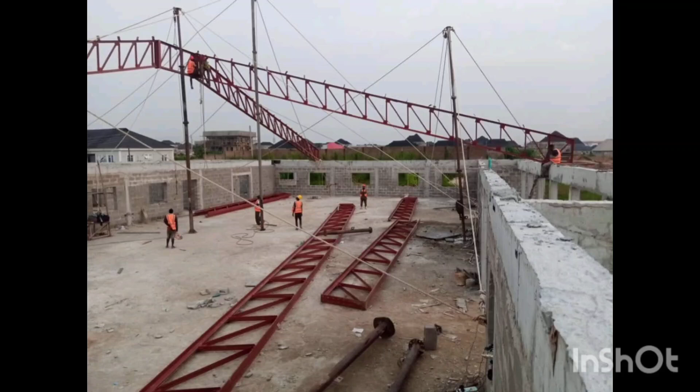Hello everyone, in this tutorial I'm going to explain how to measure roof trusses, steel roof. So this is the 3D, and this is the roof plan.

First of all, I'm going to interpret the drawing to us so that we're able to understand the roof itself. So let's get started. Now this is the roof plan.

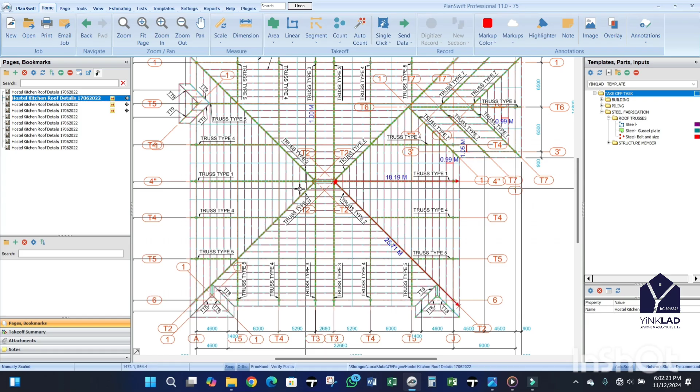We have different types of roof trusses here: type 1, type 4, type 2, and others, and we have type 3. Next page, we have type 1, and we have two numbers of type 1. Let's check it out, this is type 1 and this is type 1.

We have two numbers. I want you to take something into consideration. When you're measuring the roof, you have the roof plan, and also the section. Mind you, when you are viewing a roof from the top as a bird view, the dimension you take from the roof plan will be different, it will be lesser, compared to the section, I mean when the roof stands, when the construction has been done.

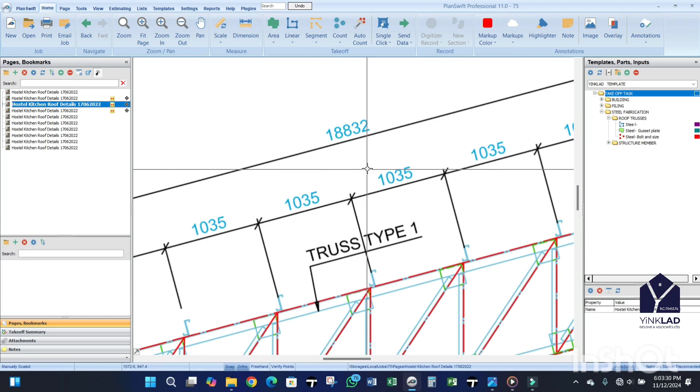So what do we have? For type 1, we have 18.19 here. So for this section, we have 18.832. Now, for the interpreting of the drawing that I said.

So now, good, let us start. I'm going to start, okay.

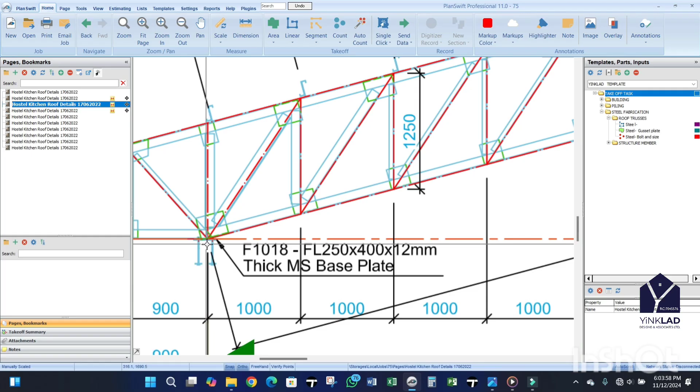We have gussets, we have base plate. This base plate is being positioned on the roof beam, like it is fixed on the roof beam. It's connected to the hold-down bolt that is inserted into the roof beam. After placing the base plate, there'll be a nut that we use to tie it down on the roof beam. So we have F1018 FL 250, blah blah blah, thick MS base plate.

I'm still going to show you some pictures during the fabrication and installation. Just hold on, I want to interpret this drawing first.

So this one is a universal beam, UB universal beam, to receive truss type 3 at both flanges. What do you mean by flanges? I will explain that on the picture.

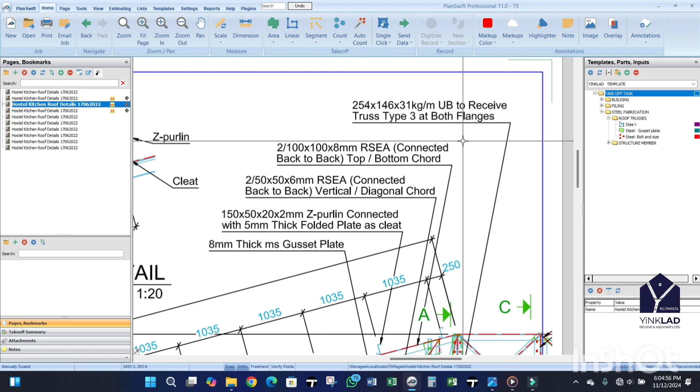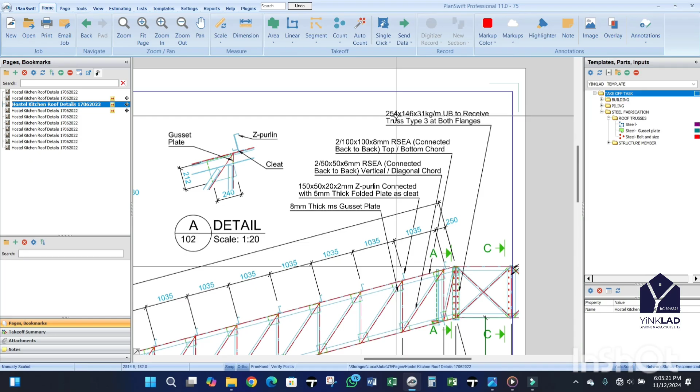So that means what this drawing is saying is that this is 254, 146, 31 kg per meter, to receive truss type 3 at both flanges.

Let me show you truss type 3. This is truss type 3, I'm coming. Okay, you have four numbers of truss type 3: one, two, three, four.

That means the beam I showed you, the universal beam, is to be positioned here. So you have flange here, flange here, and this is the web, flange here, flange here. According to the drawing, this is what we want to measure for now: truss type 1. So the truss type 1 will be fixed inside the web.

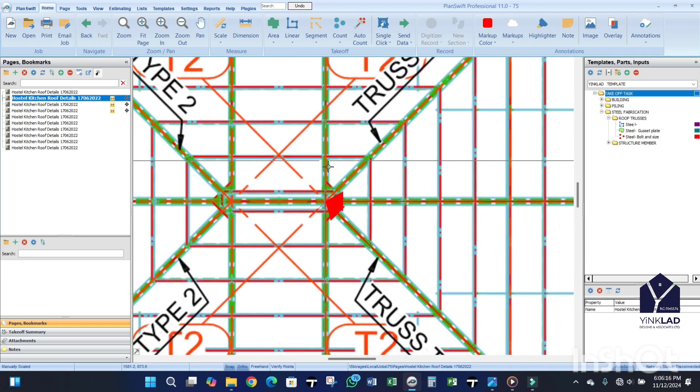You understand? Then truss type 3, what is it called? Truss 3 will be fixed, attached to the flange of the universal beam with bolts and nuts. Good, then what else?

2 by 100 by 100 by 8, connected back to back, top and bottom chord. So let me explain this one, let me see the call out.

Okay good, this is what is being called out as back to back. I want to explain back to back to you guys. So this is what we mean by back to back. Let me first show you this one.

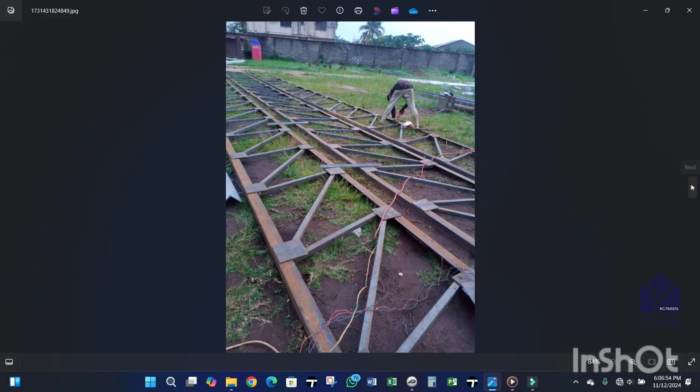You have fabricated one side, you also fabricate the other side. So these two trusses, after fabrication, are being placed back to back, like this one is placed on top of this one. That is what we mean by back to back.

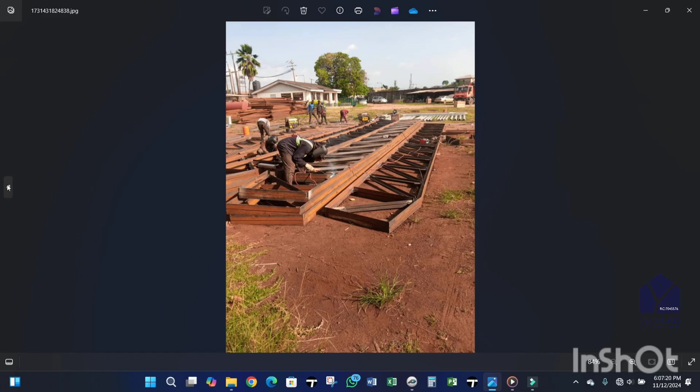So the one being called out that I explained last time is here at the top. Let me show you, so this is what we mean by back to back. It is being lapped, positioned at both ends, you understand me, one, two.

So this is what is being called out that I showed you. Let me show you this area, top, the top chord, according to the top or bottom chord. This is the top chord, you understand me? This is the top chord. Here, straight down is the top chord. This one too is the top chord, it's back to back.

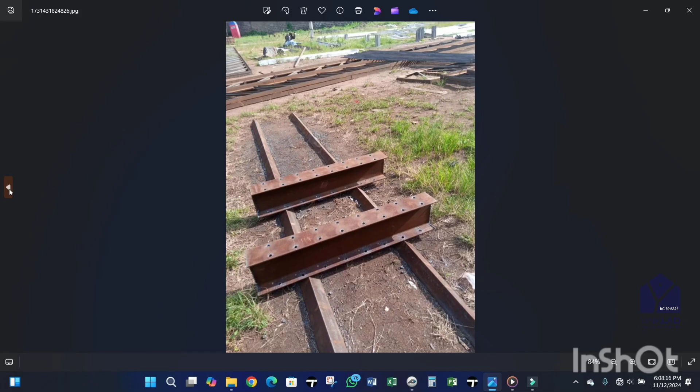Then next one, just check this one out. 50 by 50 connected back to back again. So the diagonal, vertical or diagonal chord. This one, let me show you guys. This is the diagonal. Let me check down. Okay, good. This is diagonal.

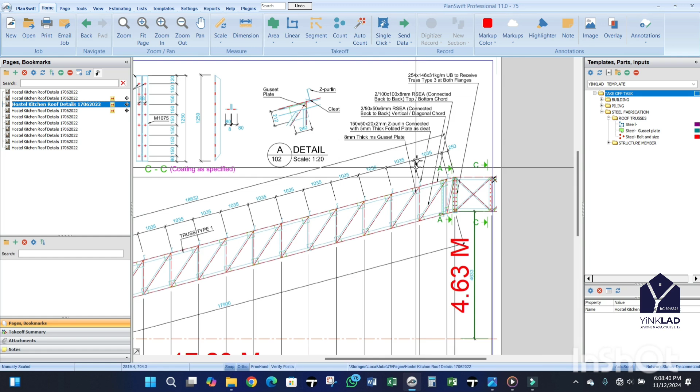You understand me? But this is another truss type, maybe one or two. It's not truss type one. You're just trying to explain the diagonal chord. Diagonal chord, right? Yes. So you are done with this one. Then what else? Purlin. Okay. 150 by 50 by 20 by 2 mm Z-purlin connected with 5 mm thick folded plates as cleats.

The purlin. I don't know, maybe I have the picture here. Oh my god. Oh my god. Ah, it's not how it is. Okay. I don't have it, mistake.

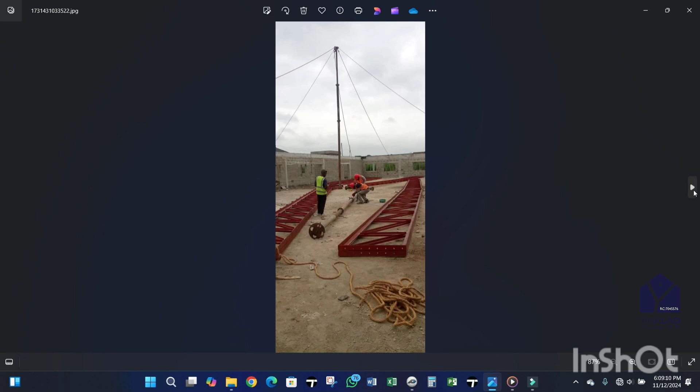Okay, let me just explain where the purlin will be positioned. Let me first check the roof plan. Okay, this is the purlin line. You understand me? This vertical and horizontal are the purlin lines. You understand me? It will be positioned according to this. He said Z-purlin connected with 5 mm thick folded plates as cleats.

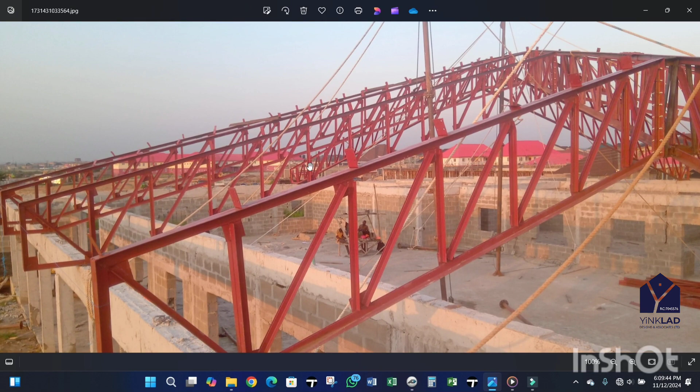Let me show you in the picture. This is the cleat. This cleat is being fixed, is being attached on the top chord that I showed you that time. This is the top chord. The cleat is being positioned on it so that the Z-purlin will be attached, will be screwed to this cleat, but the purlin has not been fixed yet. I don't have the picture on my laptop for now. So this is the diagonal chord that I explained that time. You understand me? So what else?

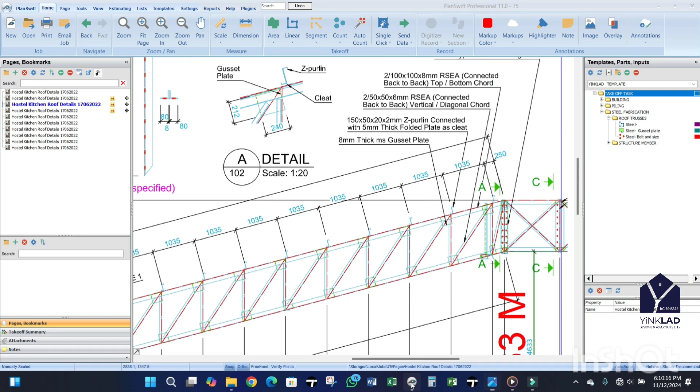This is the gusset plates, 8 mm thick MS gusset plates. Let me show you guys. This is what I mean by gusset plates. The gusset plate is being positioned, fixed in between the back to back chord. Let me show you during the fabrication. This is the gusset plate. The function of the gusset plate is to help hold the vertical and diagonal chord and the top and bottom chord so that everything will stand firm together. You understand me? So we have two gusset plates, the first side and second side. We now attach it together.

I'm coming. I want to show something.

Okay. What we did then, I could remember, is that we have only one gusset plate. Only one gusset plate I could remember, yes. Because let me check this drawing. It's only one. It's not back to back. You understand? It's not back to back because it's not given that it's back to back. It's only one gusset plate.

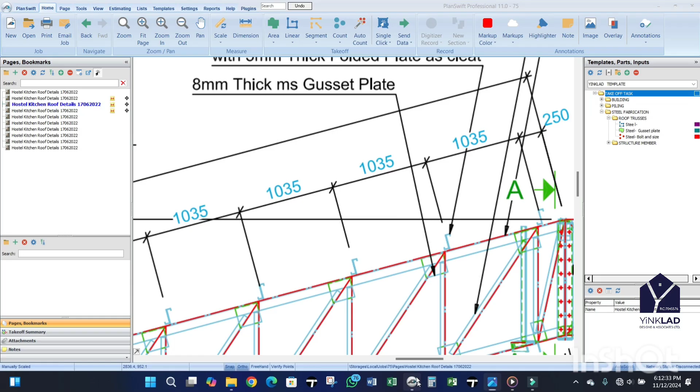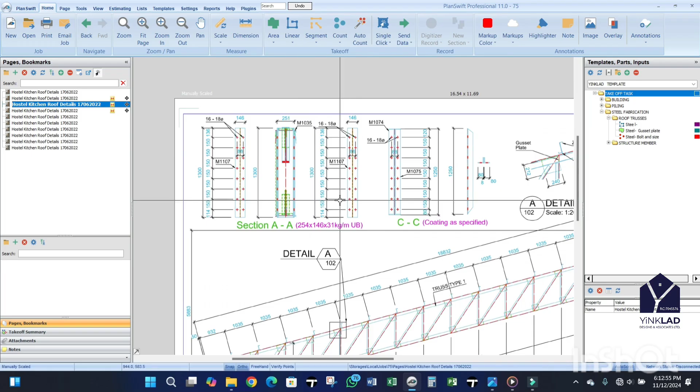So what else? This is the universal beam here. This is universal beam. You see, you have all the sizes. It's given 254 by 146 by 31 kg. Good. So now this is the universal beam. So now can we get started? I mean, can we keep moving?

Okay, good. To measure, let us start with the top chord. Just click on this. I've already created this template. We are using linear method and linear tools. So just type the size; as you can see, you have 2 by 100 by 100 by 8 mm.

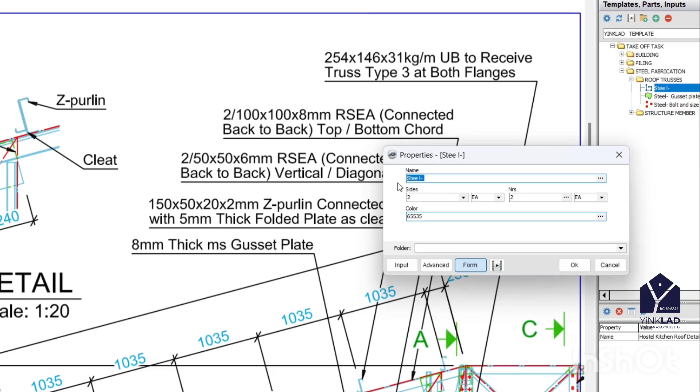So just type steel roof truss. Okay, roof trusses. So I use steel roof trusses. Let me use steel roof truss.

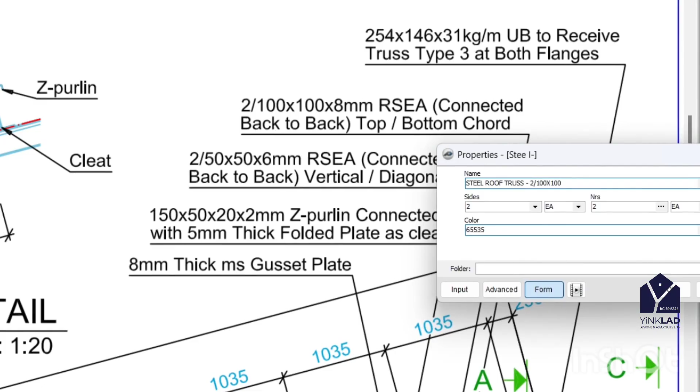Then just type 2 by 100 by 100 by 8 mm. You understand me? So that is back to back. The two means back to back. That will be how many? Two. You have two numbers. Yes, two numbers of type one. Okay.

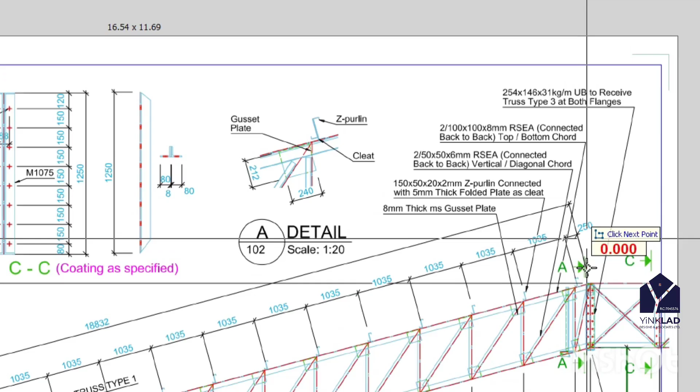Yeah. Click on OK. Make sure that your record mode is at point to point. Just pick it from the middle of the web, because the type one is being positioned, is being fixed at the web. Yes, web of the universal beam. Pick it from this end and just drop it here. Here. Click on escape. You are done with that.

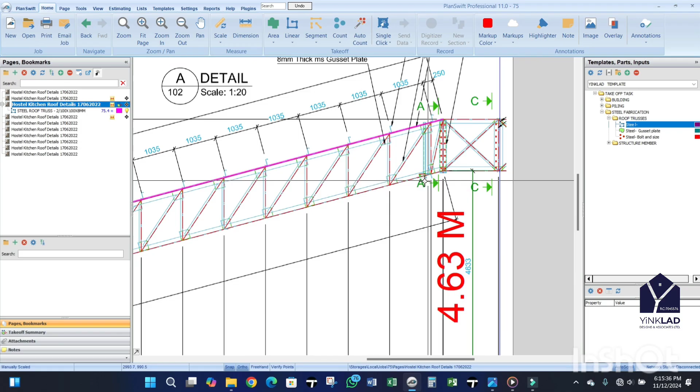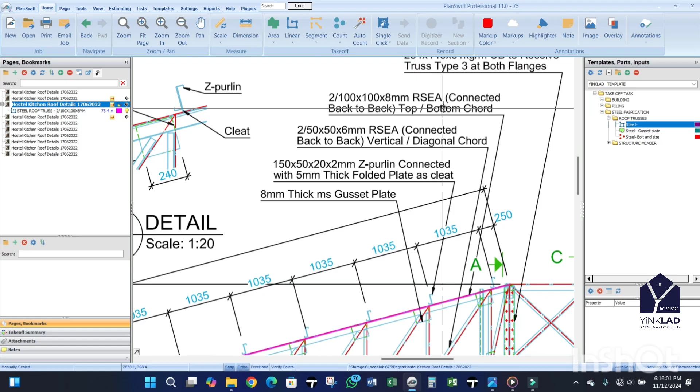So what else? The bottom. What else? It means the bottom. Just double click on this, Control C. The bottom. Yeah. Out of the bottom. I want to check if we are giving the size of the bottom. Okay. Yeah, I got it. So this chord is the same size for the top and the bottom. You understand me? Because you are giving already top or bottom, to use for the top and the bottom.

Yeah. Okay. Top or bottom seems applicable to this one, vertical or diagonal. That means you are going to use the same size for the diagonal and vertical, since it's applicable to this, I mean for the top and the bottom. So now what I'm going to do is just click on this, click on N for continuation to proceed. Just click on this, fade it out. And yeah, click on escape. So you're done with that.

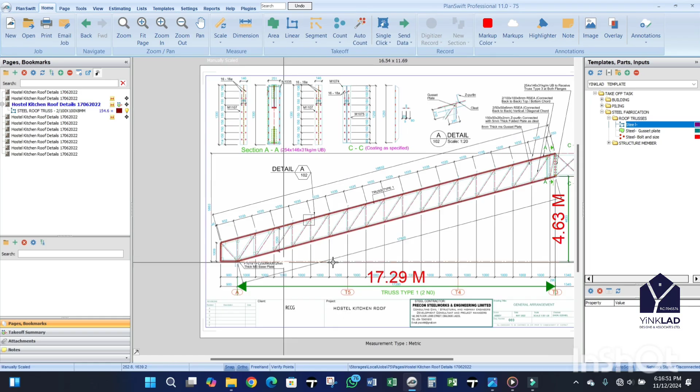Mind you, let me show you the picture again. This top and bottom, we don't have it here at the web. It's not there. So let me check another drawing. Maybe I can show you. Okay, good, this is what I'm saying. This 100 by 100 at the top and bottom, and you see that they are the same. So there is no 100 by 100 attached to the universal beam. Okay, thank God that I have the picture here.

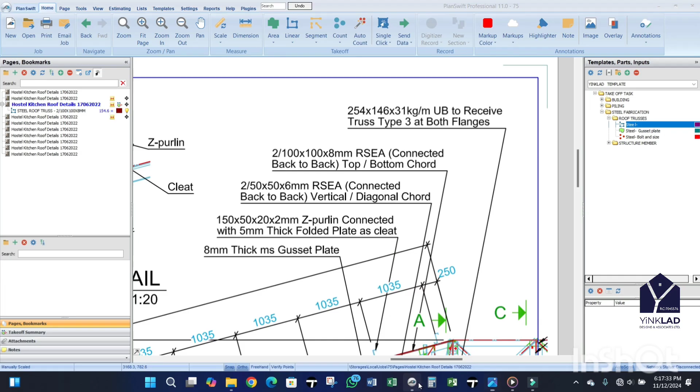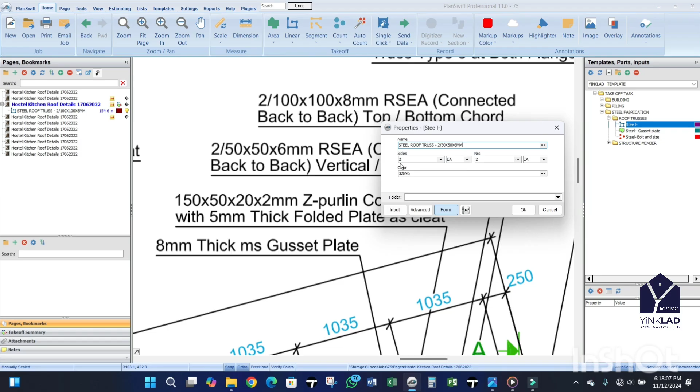So now what else? We are done with the top and bottom chord. The main vertical and diagonal chord, that is 50 by 50. Good. Just click on this. Just paste it and just change this one to 50 by 50, by 6 mm. Yeah, good. Same thing, both sides, back to back, two numbers. Type 1, you have two numbers. Okay, I'm right. Type 1 is two numbers.

So now, what I'm going to do is just pick it from this end. Yeah, stop here, come again, stop here, come again, stop here. Oh, sorry. I'm very sorry. I could remember doing the fabrication. Even apart from doing the fabrication, it stopped at this end. It stopped at the side of the gusset plate. Click on escape. Let me show you guys based on fabrication.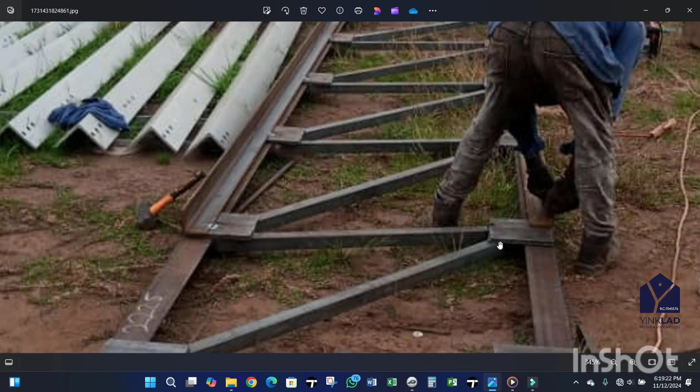Okay, according to what I said earlier, we have only one gusset plate here. Can you see that we have only one gusset plate here? This is one gusset plate. Yeah, good. But yes, this one is two. I could remember. The reason why this one is two, let me explain: we want to use this one as a template.

So when we are done with the second one that you are fabricating on it, we just remove it and drop it at one side. So we now fabricate another one on it to form one unit of the type 1 or type 2. You understand me? This is two gusset plates. We want to use this one at the bottom as a template, so we now form another one. That is why you are seeing two gusset plates here. So what I'm trying to explain that time, I don't even remember. Is it not gusset plates?

Okay. Yeah, I'm talking about the vertical and horizontal chord. So let me check the vertical and horizontal chord. At least this one is okay for us. You can see clearly. So it starts by the side of the gusset plate and also terminates at the side of the gusset plate. Same applicable to vertical. Not that the vertical and diagonal chord starts from the top and bottom. Top and bottom start from the top chord and terminate at the bottom chord.

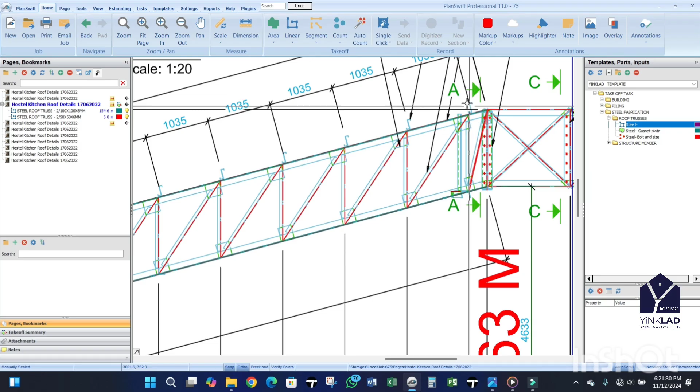So now just continue this one. Oh, I've deleted it. Let me check. Okay, it's there. Click on N to proceed. You now click on this again. So terminate here, terminate here.

Click on N because it starts from here. You stop here. Click on N again to proceed. Do you know the reason why we are seeing this red line? Let me tell you the reason why you are seeing this red line.

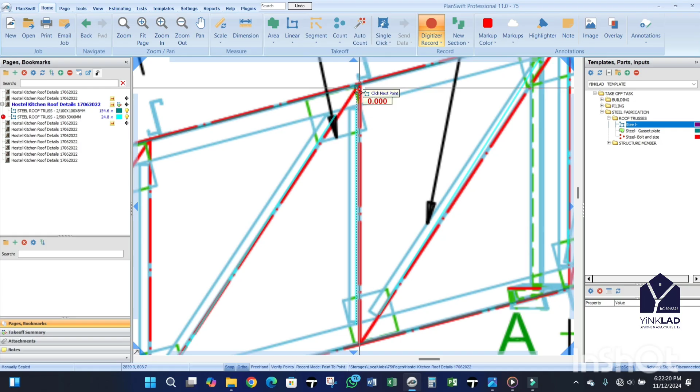The red line means that during the fabrication, the edge, the side of this diagonal chord must be aligned with this. For example, if you have positioned this vertical chord, just make sure that you transfer the line from this point to this point during fabrication. So once you point it out here, then when you want to do the diagonal, make sure that this point links up with this one, so that you're able to position this diagonal chord.

That is the function of this red line. It's for the design. But if you want to fabricate it, just make sure that at least you can see the shape of the diagonal chord. That means the diagonal chord will be positioned on the gusset plate. So now, let's keep moving. You stop here. Let's proceed. Stop here. Pick it from here again. Stop here.

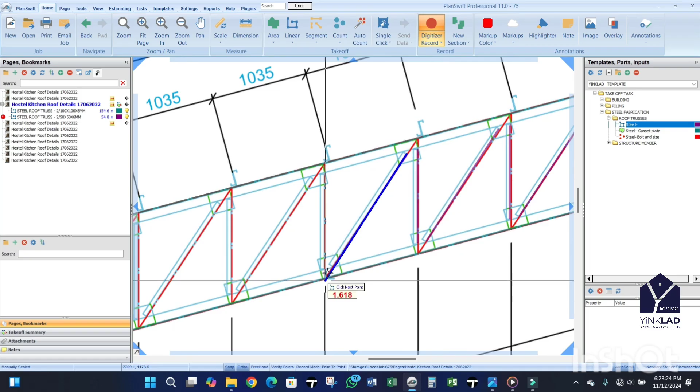So that's what I'm going to do all through. I'm going to take measurement of two trusses in order not to waste our time. You understand? And after that, I will also measure for this roof covering. And there's something I want to show you, an app to recommend.

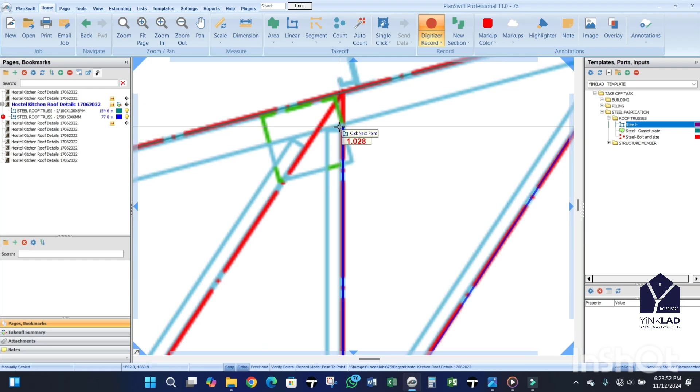There's an app that I want to recommend for you guys. The app will enable you to determine the angle, determine the roof pitch. So it will make your work faster. Even if it is roof trusses for steel or wooden, if the architect didn't give you the roof pitch, at least with this app you'll be able to determine the roof pitch.

Once the architect has given you the riser, I mean the king post, with this app you're able to determine the roof pitch. That is what I use to determine the pitch of this roof here.

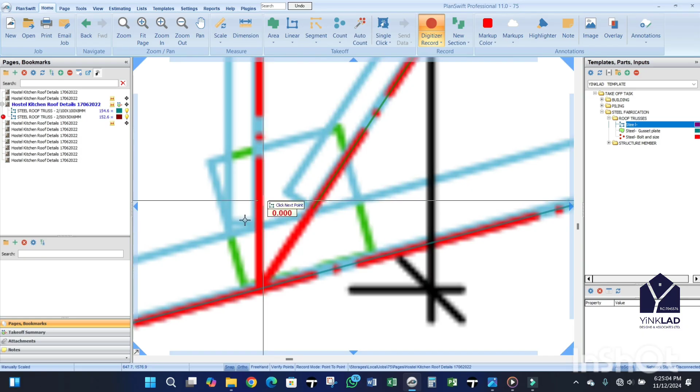So, just be patient. I won't take much of our time. And don't be annoyed that my tutorial always takes up to an hour or more than an hour. I just like to break some things down and to get some measurement, not that I'll just go straight to the point, like, okay, measure this, measure that. You understand? Okay.

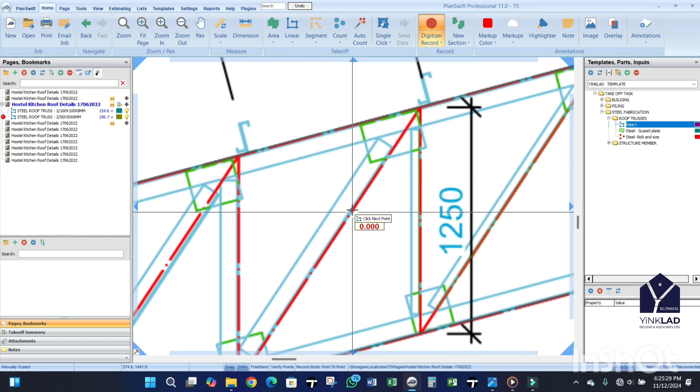According to what we are seeing here, you can see that this member is thicker, I mean it's wider than this. Let me escape it. This one is wider than this. I think we use 100 by 100 for this one, because on the drawing it is not called out. It is not shown on the drawing, the size of this angle bar.

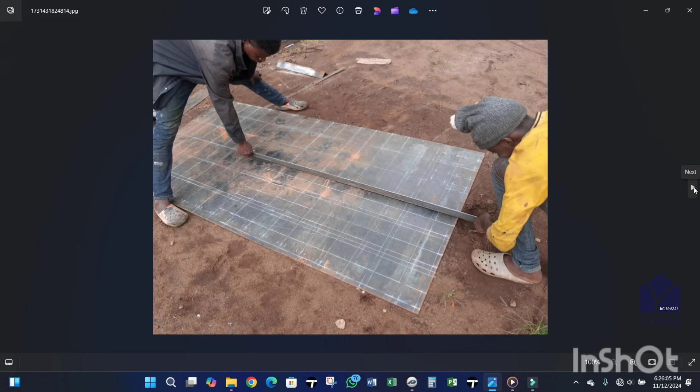So let me check something here. It seems that we use 100 by 100, or we maintain the system 50 by 50. Yes, we maintain 50 by 50. It's only this side, I could remember. This edge, we use 100 by, let me check another one. Yes, it's also here. We use 100 by 100 here, but others we use 50 by 50. Let me check another. Yes, we use 100 by 100. That's what we did.

I think this is a sample of type 1 or something like that. So we use 100 by 100 here. You can see this flange of this one is also the same as this. We use 100 by 100 for this side, for this vertical one. You understand? But for this, we maintain 50 by 50.

It depends on your choice, because the drawing doesn't call out the actual chord to be used. But on site, we use 100 by 100 for this one, and for all this one, we maintain 50 by 50. 1, 2, 3.

But according to this design, it is 100 by 100. But on site, because it's my boss that designed it and we also fabricated it together, we used 50 by 50 for this one. Okay, let us assume that we want to follow the design. You understand me now? So now, I stopped here for this 50 by 50, right?

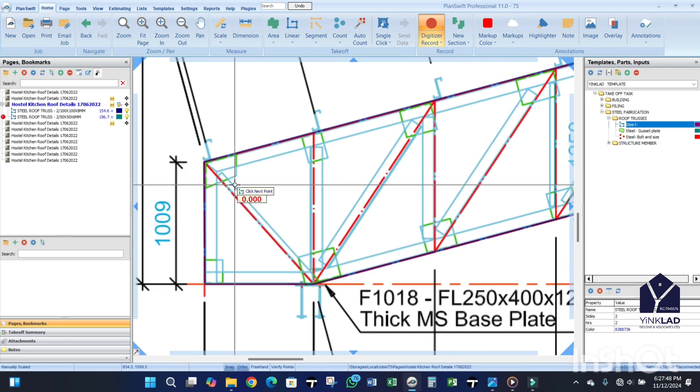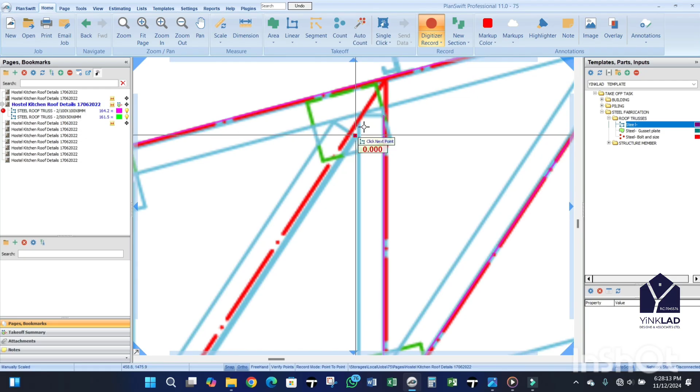Click on N. So this one is 50 by 50 also. 50 by 50. So click on escape. According to what we are seeing here, this is 100 by 100. So let me just click on this and pick it, stop it here, then continue. It depends on your choice, but when we fabricated it, we used 50 by 50 here. But for this side, we used 100.

So yeah, we use 100 by 100 for this. Yes, it's 100 by 100 for this. So let me check the legend. Oh, I'm sorry, I'm coming. Show legend. So total length for the 50 by 50 is 161.5. For 100 by 100 it is 173.9 meters. So what else? We are done with the vertical, diagonal, top and bottom chord now.

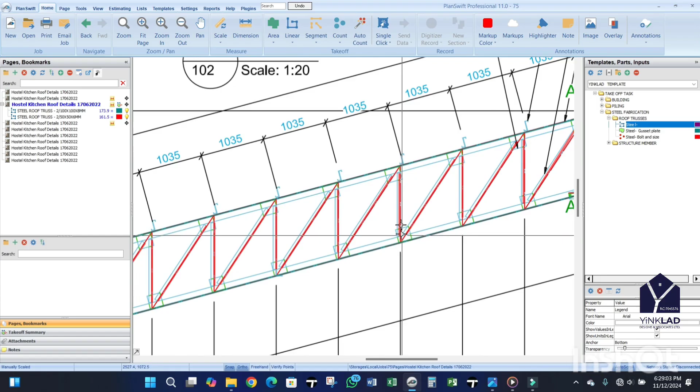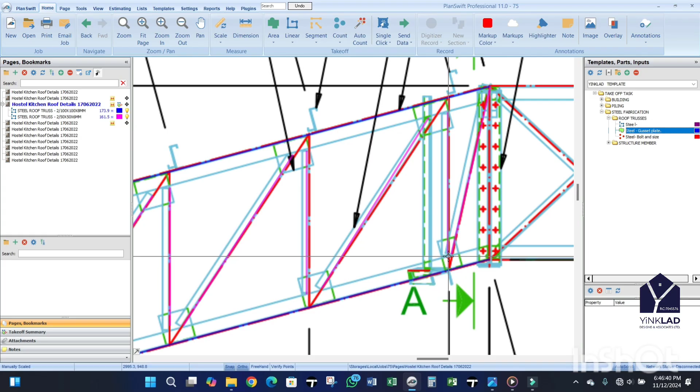So we are left with gusset plates. Yeah, what's next is gusset plate. How many gusset plates do you have? We have one, two. So you are making use of this same one as position A. You understand? So okay. You can also do this one separately as it is in the design.

So now 1, 2, 3. I'm coming. Okay. 1, 2, 3, 4, 5, 6, 7, 8, 9, 10, 11, 12, 13, 14, 15, 16, 17. This one is different. 17, right? So 17 times 2 at the top and bottom. That is 34, right? You have 34 of this.

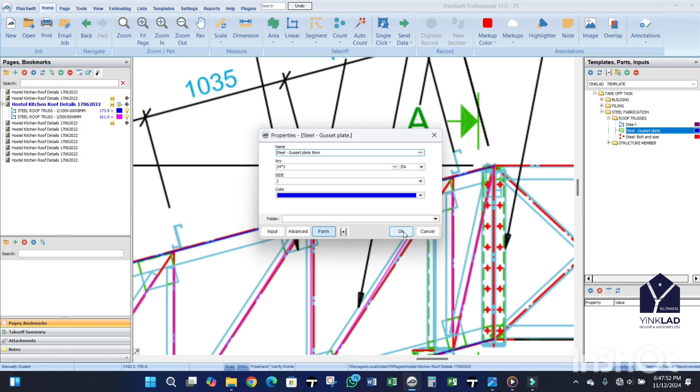Let's click on the gusset plate: 34, right? The 34 is for one truss. You understand? So we have two numbers of type 1. That will be 34 times 2. How many sides do you have for the gusset plate? It's only one side. So that is the gusset plate 8 mm. Just make sure that the record mode is at point to point. Yeah, click on escape.

So 3.4 square meters. So the next one is, how many of these do you have? Okay, let me click on this. How many numbers of this one do you have? You have 2. I will show you what you want to do now. 8 mm. Click on OK. Just trace it out. Click on N to proceed.

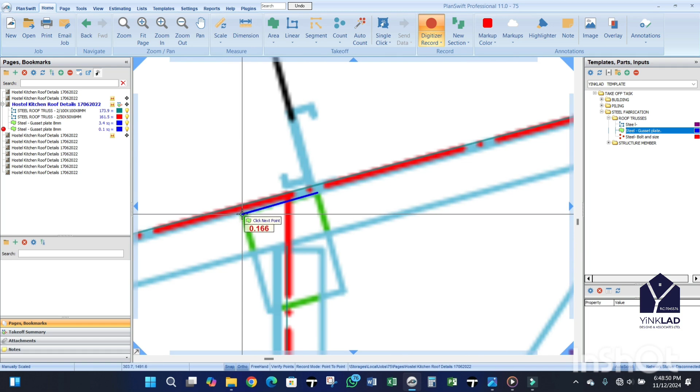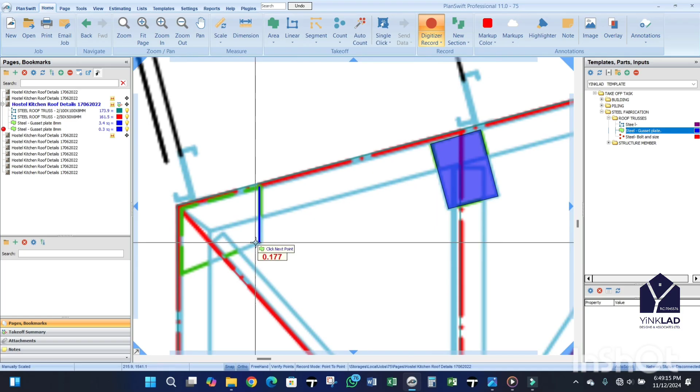Yeah, click on N again. The reason why I do this one separately is because they are different from the one we did as 34 numbers. Click on N again. Yes, click on N again. Yeah, click on escape. Let us take this one at 0.4 square meters. So I think we are done with gusset plates for now. So what next?

Universal beam. We have two numbers of universal beam. Let us check the roof plan. We have only two numbers, 1, 2. So what I'm going to do now is just click on this and name it as 254 by 146 by 31 kg per meter universal beam. Just click on OK.

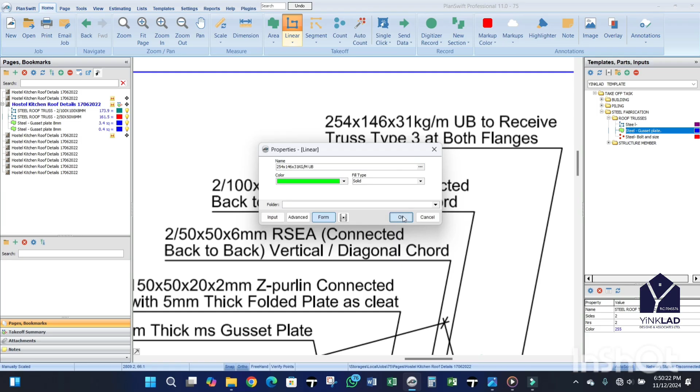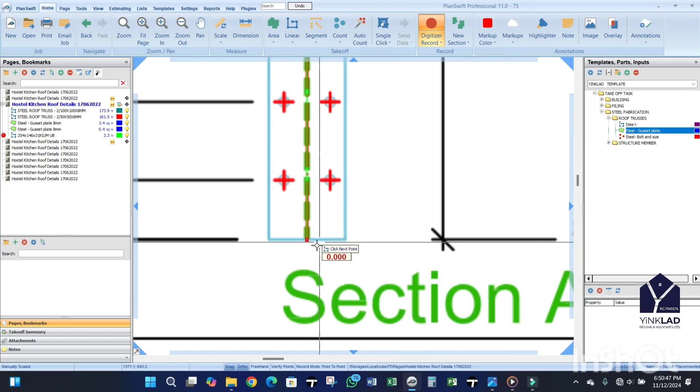You have two numbers, right? Okay, just pick it from here to here. Click on N again. You have two numbers, so just double select it. Yeah, two times. Two numbers, good. Total length is 6.5, right? For the two sides. And to determine the bolts that are going to be used for this universal beam,

this is the flange side. This thin line means the web, and this is the flange. So how many bolts do we need now? 16 to 18 mm diameter. Okay, for the bolt and screw to be used, you have 16 to 18 mm.

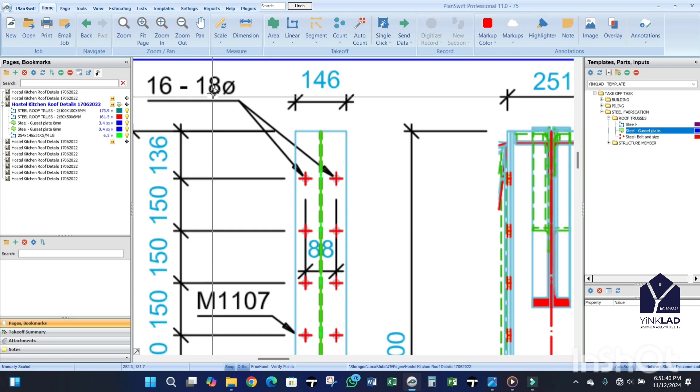But when you're drilling it, you give allowance, like space for the bolt to enter. Maybe we add like 1 mm or 2 mm to it. Understand me? So for the bolts now, we have 1, 2, 3, 4. Let me just count it. Use count. Just use 16 mm diameter bolts and nuts.

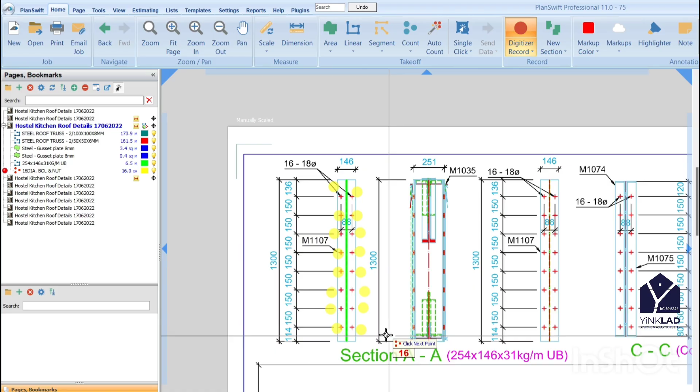How many numbers do you have? We have 1, 2, 3, 4, 5, 6, 7, 8, 9, 10, 11, 12, 13, 14, 15, 16. The other side, 16, right? Just take this one as the other side. 16, 17, 18, 19, 20, 21, 22, 23, 24, 25, 26, 27, 28, 29, 30, 31, 32. Okay. So you are making use of 32.

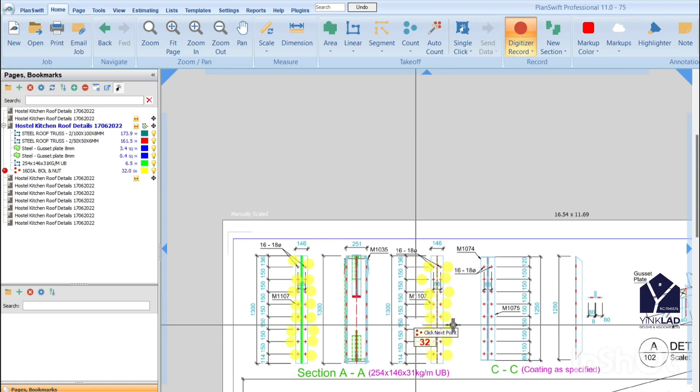Yeah, 32 bolts for the flange side. What I mean by the flange side is that this is just for the truss type 3. It will be attached to this universal beam here at the flange of the universal beam. So you are using how many numbers? 32. You are using 32 numbers of bolt and nut for this side. That is 32 times 2, that will be 64 numbers of bolt and nut for this universal beam here.

Yeah, what else? Okay. At this point, let me show you this picture. At this point, there is not going to be an angle bar that will link it up, but there will be an angle bar or flat bar here that will link from this point to this point. Another one will pick from the top, from here to here. So it'll be welded to this, and it will be also welded to the universal beam.

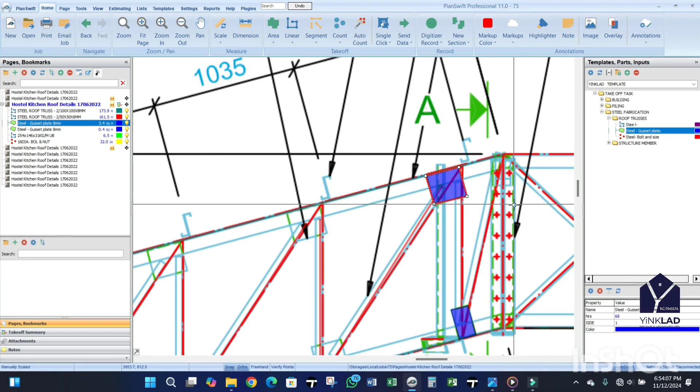It will be attached to the universal beam here. That is what we are seeing here. There's nothing like bolts. It will be welded to the web of the universal beam. So all these things you are seeing here are points of bolt. So I think we are done with this one, with type 1. So let me check type 2.

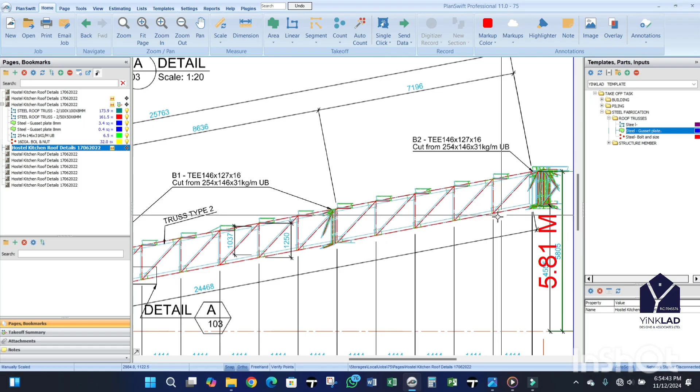What I'm going to do on this type 2 is that I'm not going to stress myself, just go straight to the point to take off for the top and bottom chord. So let me check the top and bottom chord. Where is the top and bottom chord? Okay, let me explain this thing. This is the point at which another truss meets up with the truss type 2 here. So for example, let me show you guys.

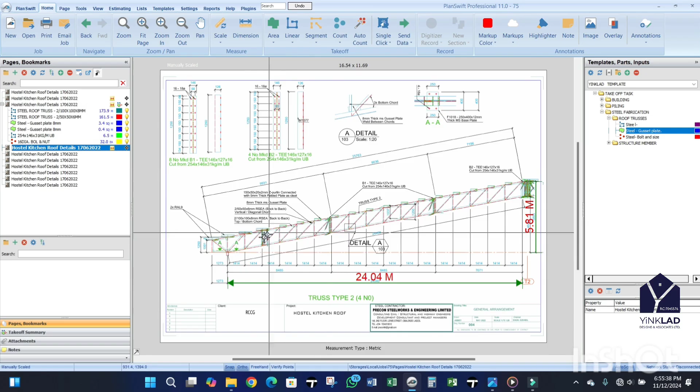This is the truss type 2, right? So truss type 4 is connected at this point, 1, 2. So you have 2 points, right? Let me show you. Can you see we have 1, 2. This one is here. It's shown somewhere here. Yes. So I'm just going to measure for the top and bottom chord only. Where is it now? Okay.

Yes, you have 100 by 100. So let me just pick it up. Sorry. Okay. Just input steel roof truss 2 by 100. Let me check this one. Maybe different. Okay, 100 by 100 by 8 mm. So it's also back to back, right? It's back to back, 2 sides.

How many numbers of truss? You have 4 numbers of these trusses. Let me show you. This is it. You have truss type 2, 4 numbers, and it's also back to back, as you can see. So it also picks from this end somewhere here. The reason why you're having all these things here is that you have multiple connections of trusses, as I will show you on the picture.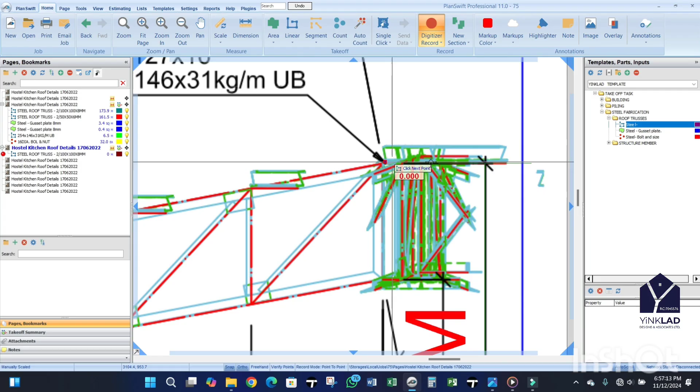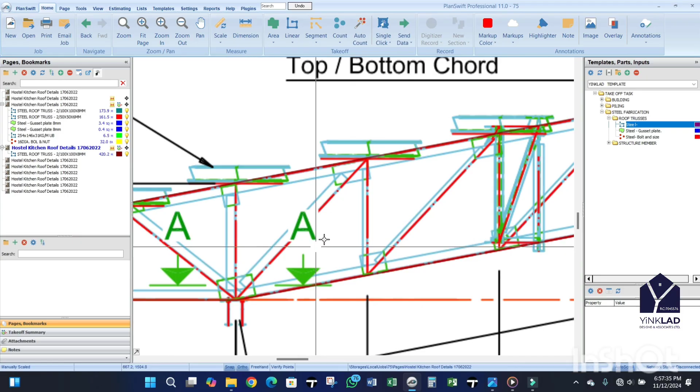So it's picked from here, continue, it also continues, it also terminates somewhere. Click on escape. According to this one now, it seems that this one is just okay. This is 100 by 100, 100 by 100, 1, 2, 3. The main ones are 50 by 50. So let us continue. Click on the one we did, click on N and pick it from this gusset plate.

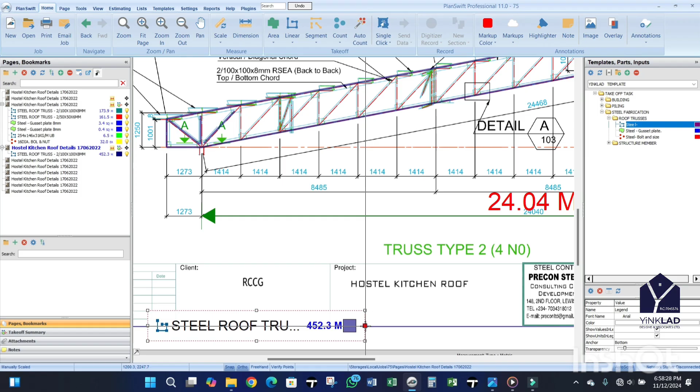Stop here. Sorry, Control N and Control Z. Yes, stop here. Click on N. Also click from here. Stop on the gusset plate. Click on N. Start from here and also stop somewhere. Click on escape. So the way I did the gusset plate is also the way you're going to work on this one. Let me show you the legend. So total length for this one is 452.3. Same thing applicable to this one.

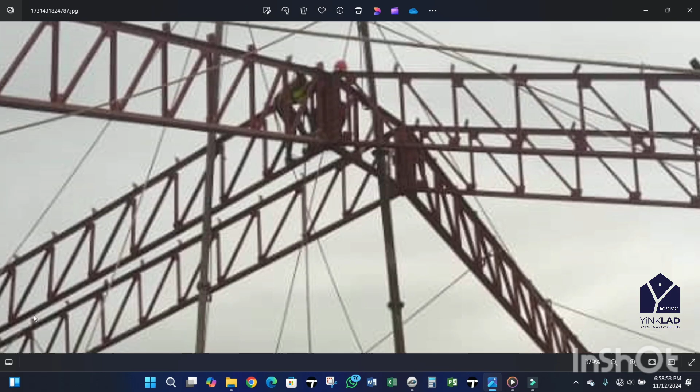Okay, this is truss type 2 that I did now, and this is still truss type 4 that is connected to the side. Yes, connected to the side here. This way has been connected. I think that is all for now.

Okay, so we are done with the roof trusses. The way I did for this is what we do for others. So now what else? Okay, good.

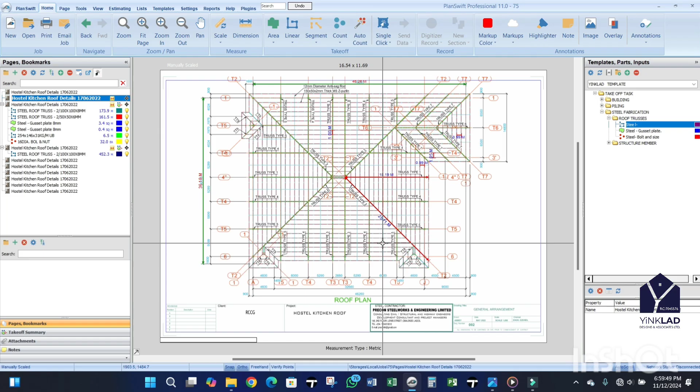I want to show you something, a calculator, how I achieve the roof pitch for this. Know that this is the riser 4.63 and this is the length 17.29. So I want to determine the slope, I mean the roof pitch, the angle, the degree of this roof. So let me show you this video.

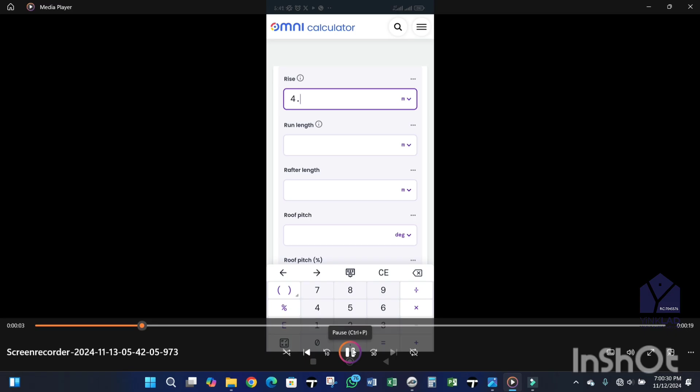You have 4.63, you have 17.29, right? Have it in mind. Now just calm down and check. The riser is 4.63, right? That's the king post. Then the length is 17.29. So as you can see, this 17.29 you are seeing here will be the rafter length. Let me show you guys.

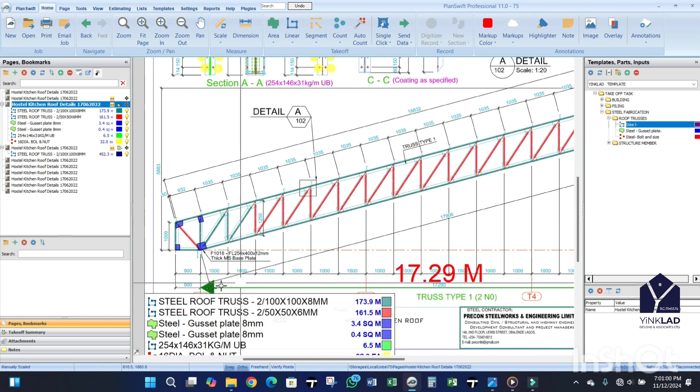At least you can check it online, this Omni calculator. So what are you seeing here? You are seeing 17.9. It is correct. It picks from here and also terminates here. That means this design is okay.

So 17.9 according to this calculator. So now the roof pitch is 14.99. That is what I need from this calculator.

So 14.99 for the roof pitch, center to center. Wait, okay, anyhow, so this one is not roof. What I want to do now is not the roof covering. Sorry, it's not the roof covering. What I want to do now is the purlin.

I'm working on the purlin right now. So I'm working on the purlin, center to center 1 meter. But I will show you how I got the 1 meter.

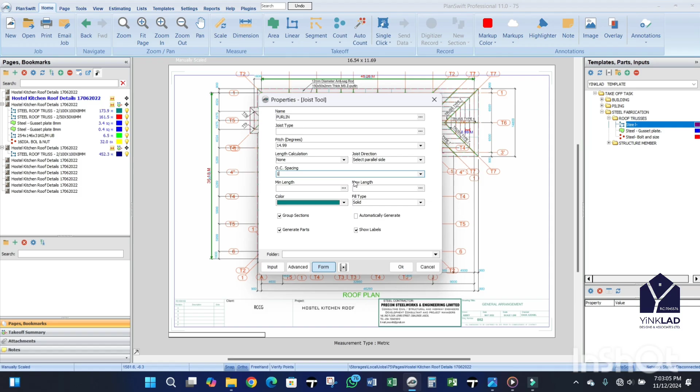So alright, the reason I don't want to change this select parallel side is that for example, if I draw it like this, the way I draw the purlin, that is the way the purlin will be parallel to it. So now, so purlin, click on okay.

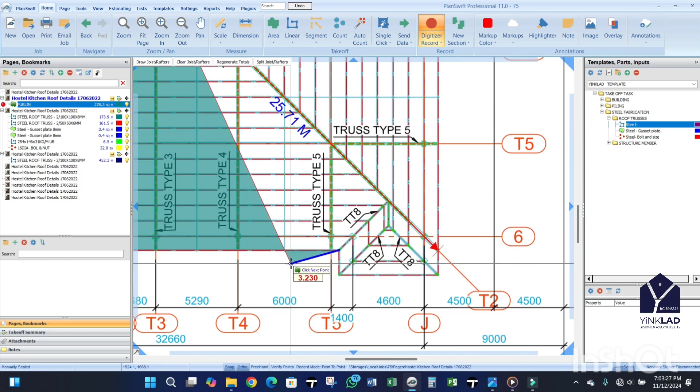I will have dimension this offsets, I'm sorry, center to center. Click on escape, then click on it and click on joist. It's too small, don't worry, just drag it here.

Okay, so the purlin is already positioned at each point of the polyline on the design.

The reason why I use 1 meter, let me just dimension this one. If I will do, let me just check it. This one is 1 point what? 1.1, so same thing. Let me check this one, approximately 1 meter.

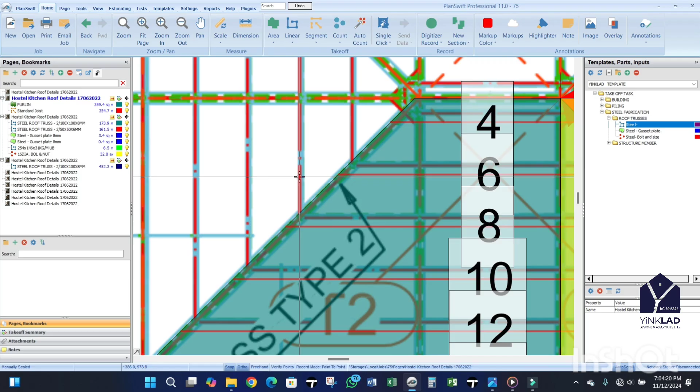So this is how to determine the purlin for the roof covering.

So now the next thing is roof covering itself. Just click on roof area, then insert the roof pitch, that is 14.99. Click on OK, just trace this one out.

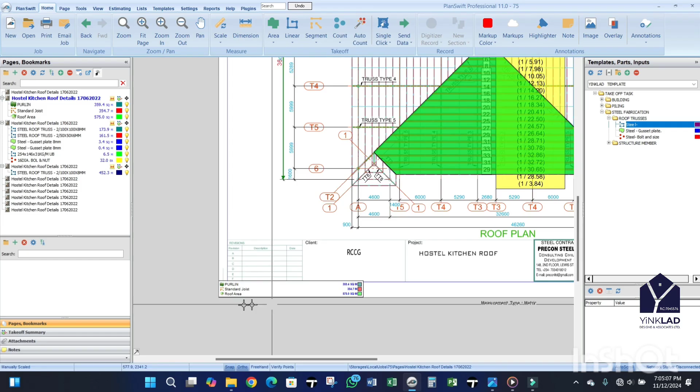Just trace it out here, click on escape. So what do you get? Roof cover, roof area, that would be 575 square meter.

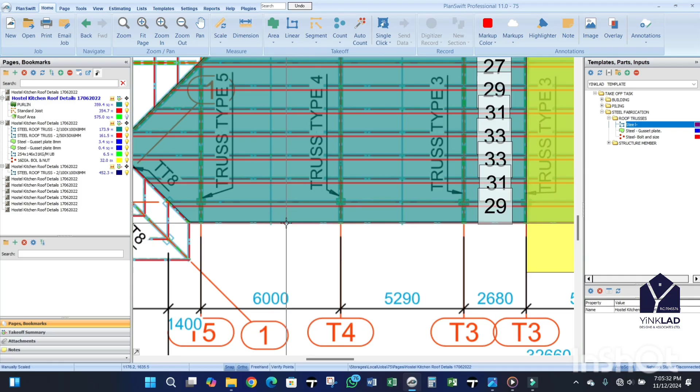This one, and you are going to observe something here, that this polyline is not added to this edge. So I'm going to do now, just click on it, click on N, and just trace this one out and attach it. Click on N again. First escape, click on escape. Okay, this one is there already. So the reason why I added this one to it is that the polyline is not added to this edge. So by clicking on it and pressing N, you're able to add the last one on it.

So this is what I have for you guys for now on roof trusses, on steel roof trusses. So this is another member of it, which is truss type 3. This is another truss type 2.